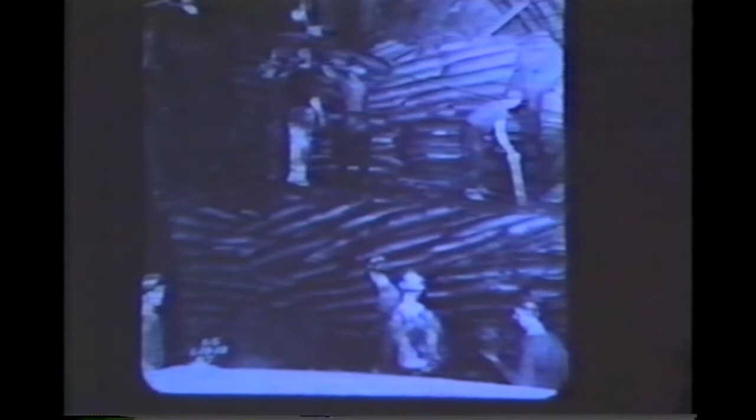This is the construction of a subway tunnel in Chicago 50 years ago. You can see that the excavation procedure was labor-intensive.

It simply consisted of slicing away the clay, throwing it by hand out to muck cars out in the end of the tunnel, and having it hauled away through the airlocks because the tunnels were built under compressed air.

The miner would simply slice off slabs of clay, throw it down to the muck car, hit it almost every time. And as the excavation advanced, steel ribs, liner plates, were put up against the crown, against the soil, held in place by these posts, which themselves were supported by bearing blocks on another block of soil.

You can see that was a pretty temporary support because the next group of miners were taking away this intermediate bench. In order to support that crown until the ribs could be extended on the intermediate bench, you see some little kicker blocks up there just to hold the lower end of the ribs.

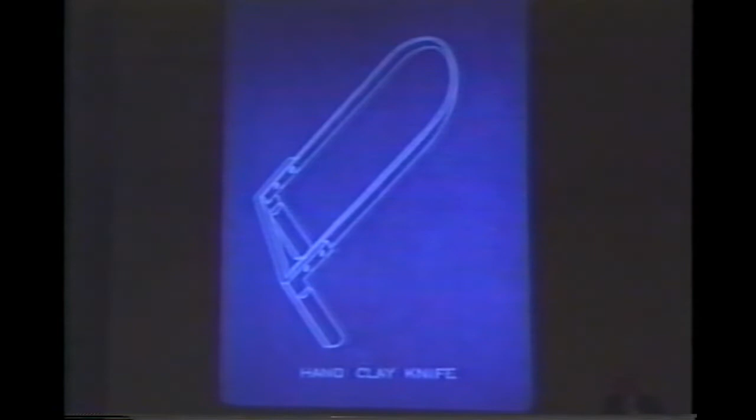This is a little sketch of the principal excavating tool, the clay knife that you saw the fellows using in the crown drift, for example. In soft clay, you could drag this through with two hands, get a chunk that might weigh 60 or 80 pounds, and your helper would catch it as you sliced it off and throw it down.

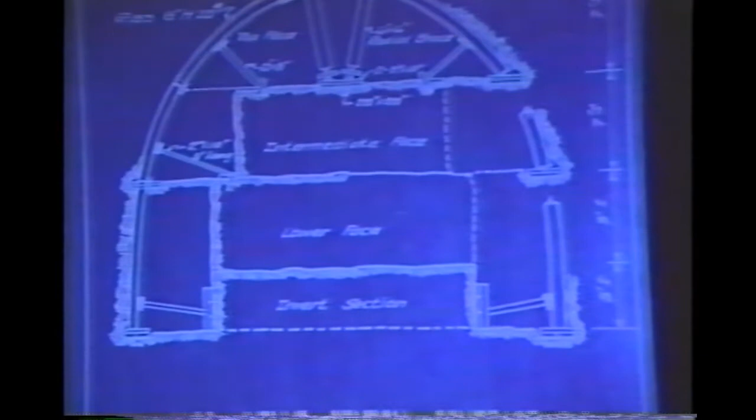This is a diagram of the procedure I've just described, and I simply want to show the more specific kinds of support that you saw at each of the different levels. And point out also that after this lower face was excavated, which you saw, the last thing to go out was the so-called invert section to make the excavation complete.

As you know, Dr. Terzaghi was the consultant to the city of Chicago on the subway tunnels. And we had set up a soil testing subsection, so-called, and indeed our first duties were soil testing. When he got the job as a consultant, construction was just getting underway.

And when we organized the soil testing laboratory, there were as yet no test borings that you would call at all modern test borings along the line of the subway routes. So for the first few months, we were very much occupied in making borings and laboratory tests to determine primarily the strength of the clay and to try to get ahead of construction with the boring program.

But after a little while, just a few weeks actually, we were beginning to catch up, and we discussed, Dr. Terzaghi particularly, discussed the reasons why settlements were occurring and what might possibly be done about it.

And he suggested it would be a good idea if we could measure some movements in the tunnel, see how much the ground was coming in. And with that suggestion, hardly saying more than that, he headed back to Cambridge and left us with a job to do.

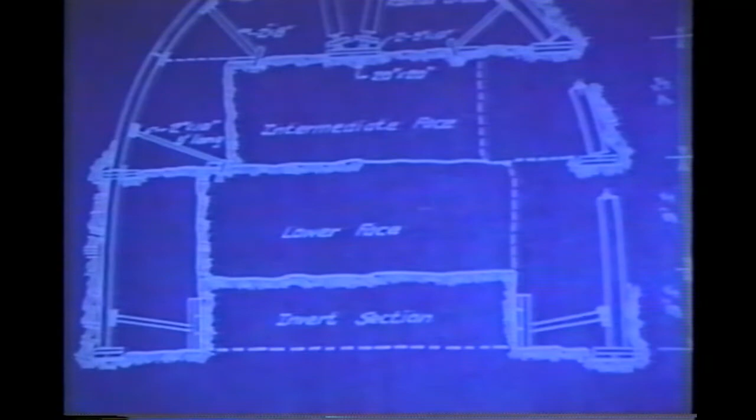But this group of us decided we would make measurements in the tunnel, see what we could get for Dr. Terzaghi over about a 72-hour period, continuously, to see what's going on. There were enough of us, so two at a time, we could be in the tunnel and observe everything that we could.

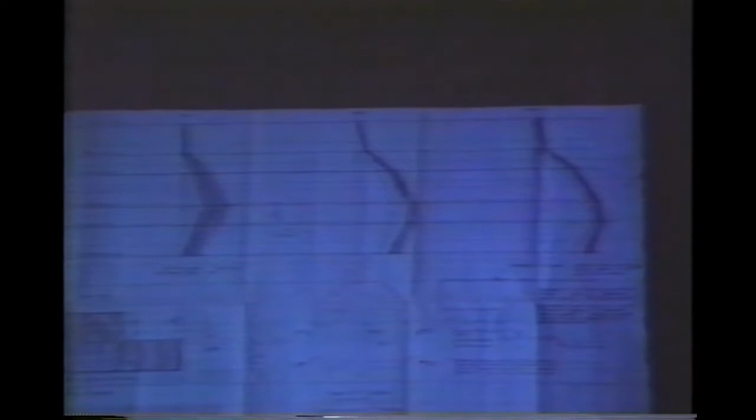Up at the top, across the top, you see a series of curves. They are settlements measured on the street over the tunnel at 20-foot intervals -- it's 20 feet from here to here, for example. Settlement reference points at the building line, at the curb line, and two streetcar tracks. Those settlements were read every 2 hours through the roughly 72-hour period that we carried out these observations.

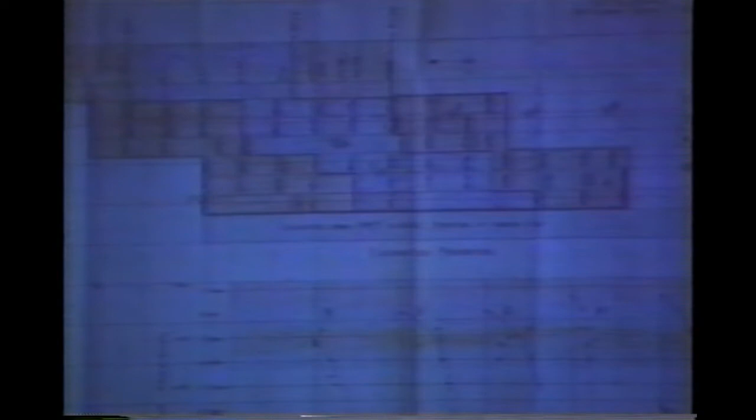Inside the tunnel, the heading was being excavated in a number of blocks: crown drift, intermediate, lower drift, invert. And the progress is shown by this intermediate diagram. When the observations started, the headings were located as indicated by these heavy lines -- the crown drift started from about here, the intermediate drift from about here, the lower drift from here, and so on.

Each of the different colors you see up there represents an 8-hour advance. So in the 8 hours, from the time we started until the next 8 hours, that sort of pinkish block of material came out at the locations indicated by the numbers keyed over here.

As soon as we had the possibility to put some reference points in the clay either side of the tunnel, we began to measure the distance between those points to see if they came closer together. Those distances are plotted down here, and we'll see them again a little closer up, color-coded with the times of excavation according to 8-hour blocks, so that the settlement observations, the inward movements from the sides, and the detailed excavation progress can all be related.

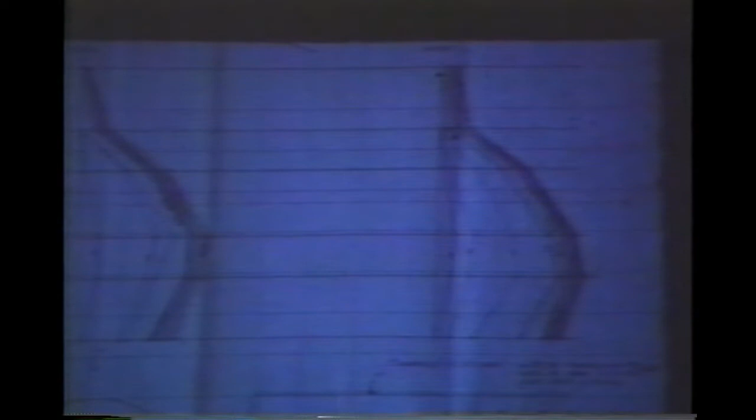We did a few other things. We drove ahead of the tunnel, as indicated on the left, some so-called spearheads, measuring out to the tail of them as we drove them, getting a distance back to a fixed point. Then as excavation came up to the spearhead's location, we began to look for it, feel for it, hoping the miners wouldn't hit it before we found it, and made another measurement back to the reference point to get some idea of how much the clay out in front of the tunnel was moving toward the tunnel as we excavated.

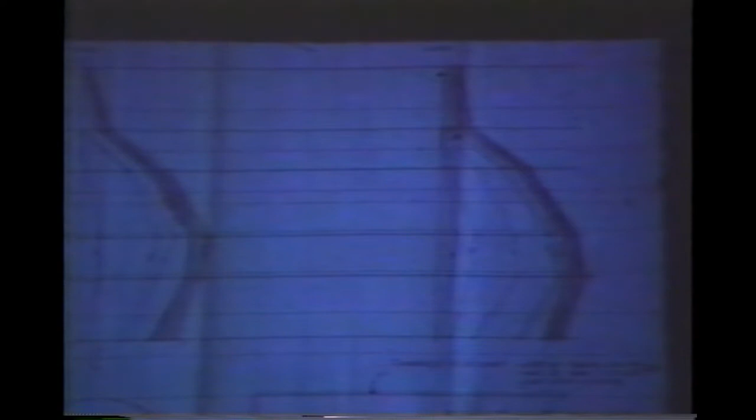We measured the settlement of the foot blocks after they were established. We established points in the crown and took level observations to see how much those points came down from the time the crown was first exposed until the 72-hour period was over.

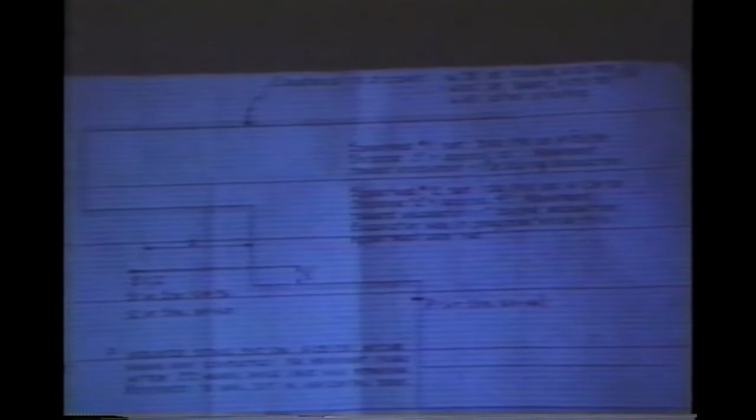Now we look at some individual pieces of this diagram. Up here is a longitudinal section showing diagrammatically where we put the spearheads. For example, you can see number S1 and 2 - those are spearheads driven ahead of the face. We couldn't get them in awfully far, but we could see how much that point moved in toward the tunnel as we took away that 6 or 8 feet of material.

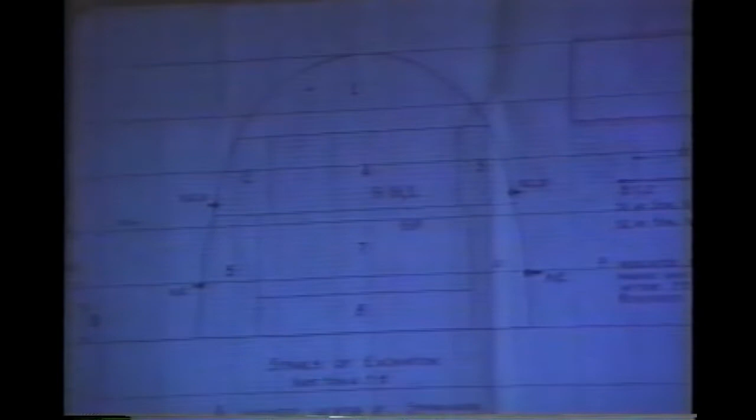You can see where that was located, plotted by S1 and 2 in this cross section. You can also see in the cross section the locations of the cross-tunnel lines.

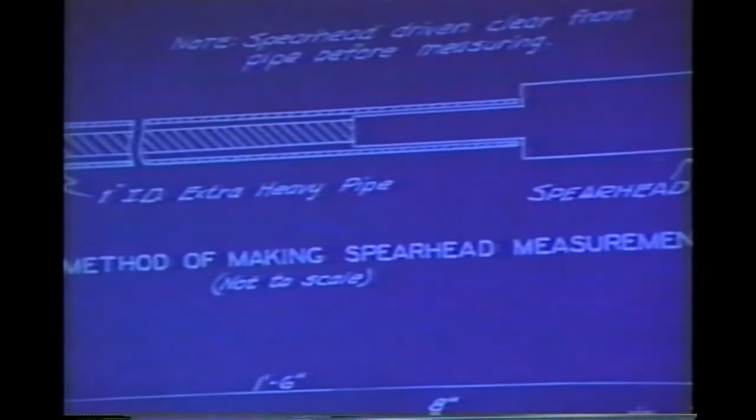You also notice there - this is the spearhead, just to show how it was done. It's a little thing, about 18 inches long, driven in by a pipe on these shoulders. While the pipe still had it in the ground, we could stick a rod in, find the location of the back end, get a good measurement to a fixed point. Take the rod out, take the pipe out, then travel along, hoping you can see that open hole until you encounter the spearhead again.

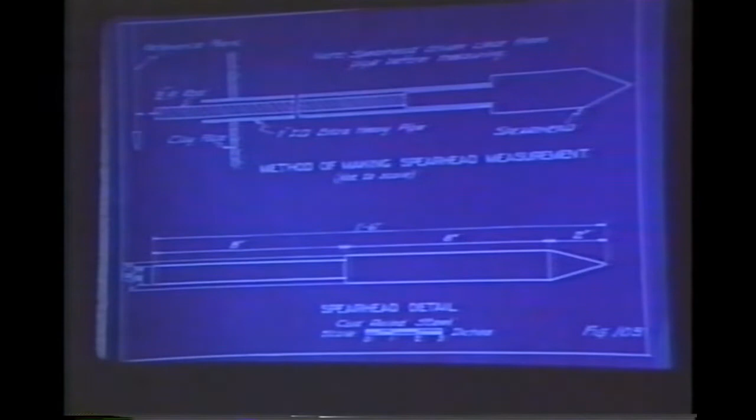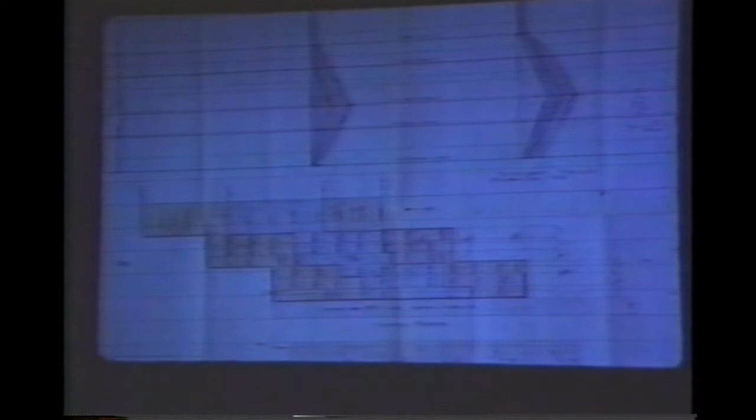Here is a portion of the diagram showing something about the settlements. You can see the progress chart a little better, and you can see a couple of the settlement diagrams over the tunnel.

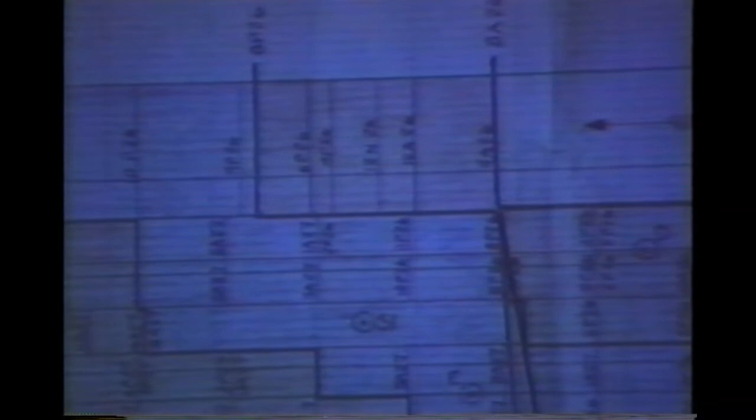Without going into the details of what we learned, I can point out that when excavation started in the crown heading, going in this direction from this point, you see very little pink, just a touch of it on the left-hand end of that upper diagram. That means hardly any settlement had occurred when the heading reached this point before we started observation, and very little settlement occurred while this material was taken out - that's the pink zone on the very left edge. Already that told us something we didn't know: that in this tunnel at least, removing the crown heading itself didn't cause much settlement out ahead of the tunnel. That had been just a source of argument up to that point. Now we knew it wasn't happening.

You can see that when the next section was taken out - the crown heading going from here to here and the intermediate from here to here - that fairly large bluish section represented the settlement that took place, which was substantial. You can see the settlement was still going on, the next pink section, when the whole tunnel went by. And quite a bit of settlement was still going on, the last colored section on the right, when this invert block was taken out. So we're beginning to relate what was going on at the street surface with the excavation sequence itself.

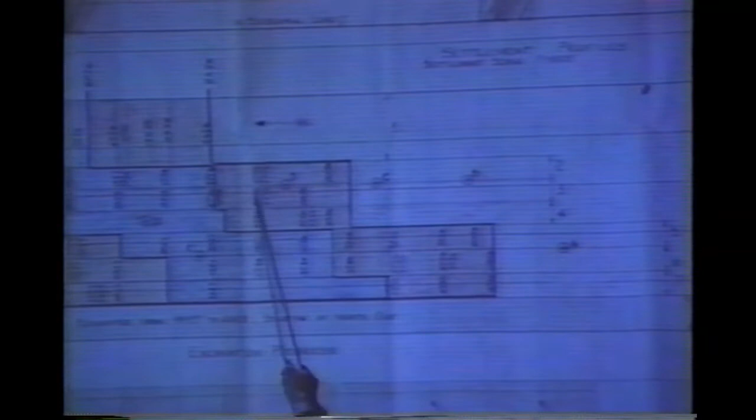I'd also point out these were the locations of the cross-tunnel lines. We started out with some before excavation began, so obviously there'd been some movement before we got them in. Then when we went by this location, we established another one, and when we went by this location, we established some more, and followed the inward movement of those points.

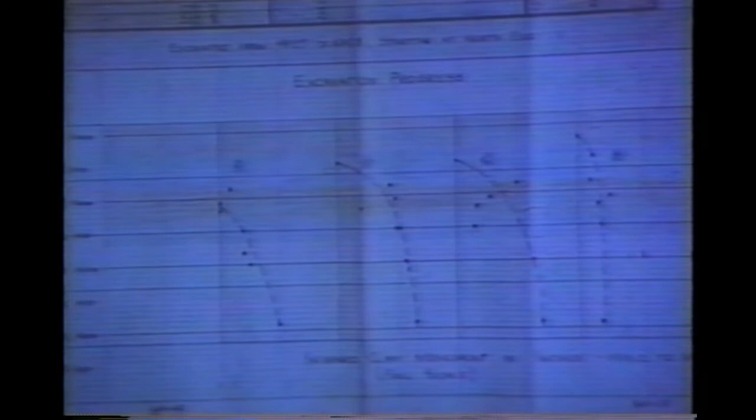Here we have the results of that exercise. You'll recognize that same diagram up there representing progress. With the same color keys, we have time reading downward, and inward movement. This represents 1 inch, so you can see there was more than 1 inch of inward movement at most of these reference points—that's the total diameter decrease, the sum of the inward movement of the 2 points.

When Dr. Terzaghi came on his next trip, we brought this diagram out and showed it to him. He concealed his pleasure with some difficulty—he really was quite excited about it, but he didn't want to overdo any praise. We thought we'd done a pretty good job, and we realized he thought so too.

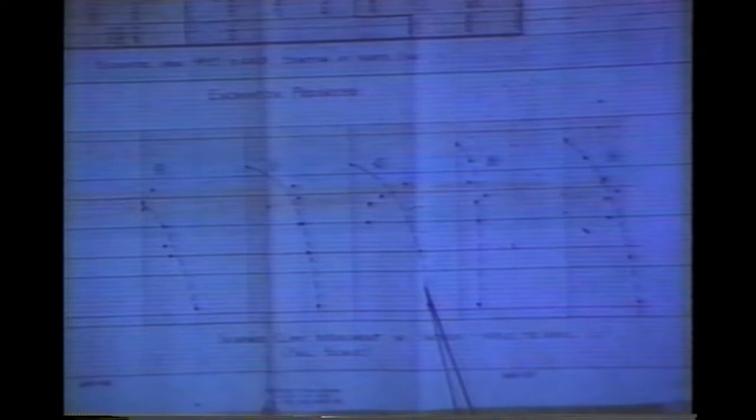But the thing I remember most about his looking at it—he said, 'You look at these points. Why did you draw a smooth curve through all those points that aren't anywhere near the line you drew?' I said, 'Well, our observations aren't any better than that. We do very well if we can be right within a quarter of an inch.' And he said, 'You can measure a line 20 feet long more accurately than a quarter of an inch, I'm sure.'

Yes, but remember, first of all, we're targets down there. The miners enjoy seeing how often they can hit our tape, throwing these clay chunks—all sorts of activity down there. They don't stop mining just because we're there; it's pretty hard to do. That's really the accuracy we have, so I just drew a general curve through them.

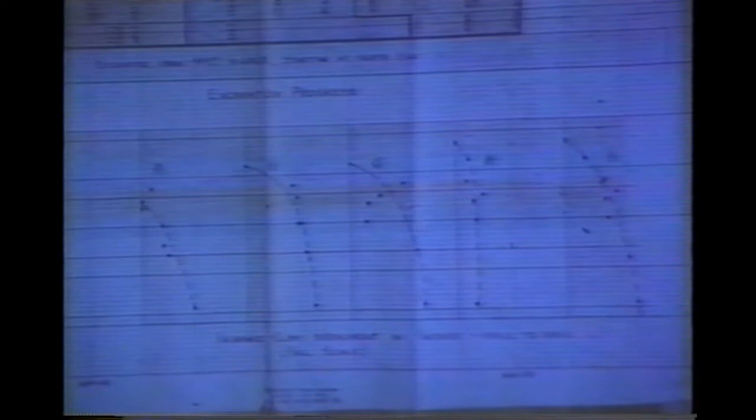Quite obviously, he didn't believe me at all. But he didn't press the point, since I seemed to be a little argumentative about it, and he said, 'Well, we shall see.' Keep that in mind, because it turned out to be an important thing in my life.

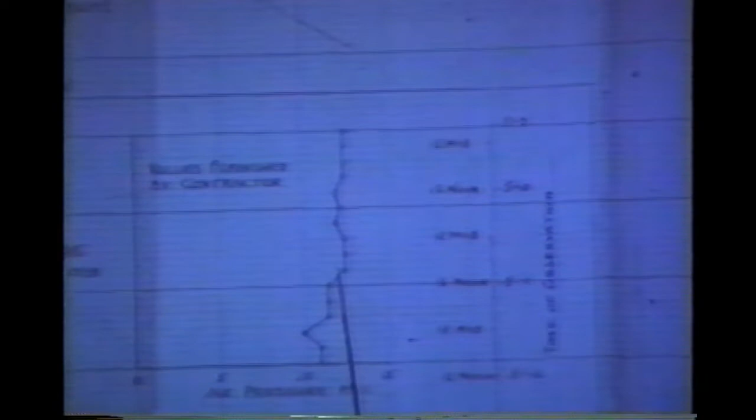Here's a little bit more of the observation. We kept track of the air pressure. You notice, again, time is reading downward, that at about the middle of the second day the contractor let the air pressure drop a bit. That did have some effect on what we observed.

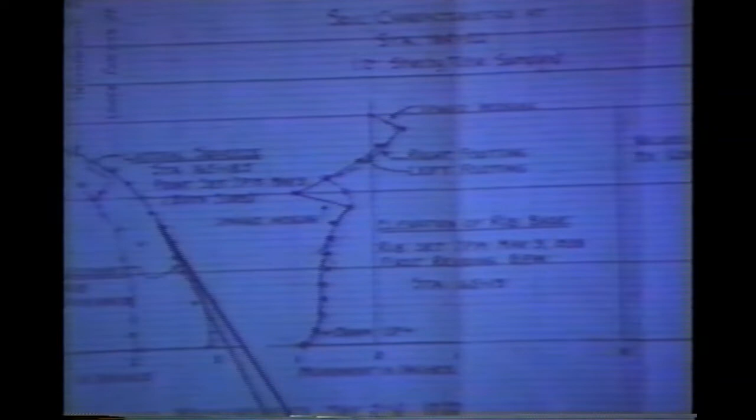A few days later, we came in to make some further measurements of crown settlement. These are curves of a settlement point up in the crown—you can see there's a little kind of a kick in it. Again, I drew curves generally through the general direction of the points, but not following the points exactly.

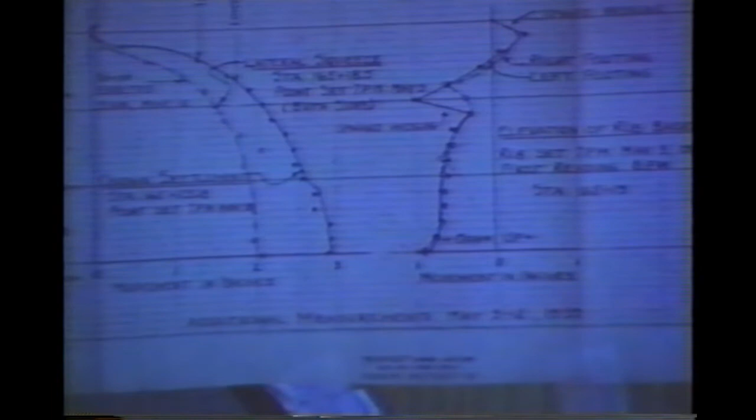Also, I'd like you to notice the date—these observations were made between May 9th and 12th, 1939. Today is the 11th of May, 1989. So I can almost guarantee you that exactly 50 years ago this hour, probably I, and certainly some of my buddies on the soil mechanics gang, were in the tunnel making these measurements. So this is sort of an anniversary.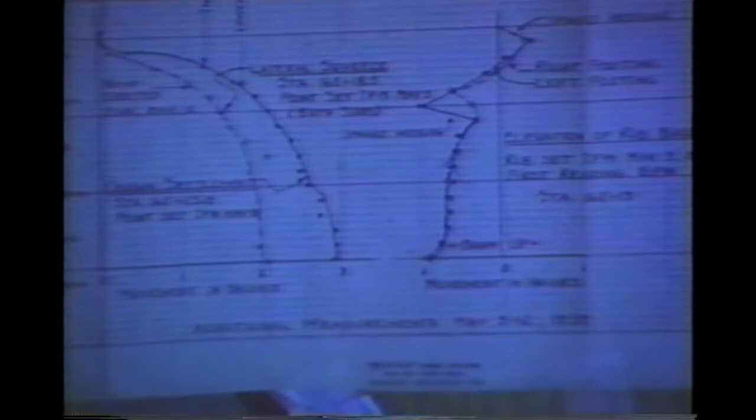We made some other squeeze tests in other tunnels with similar results, although the results varied because the contractors used somewhat different mining procedures and the tunnels were of somewhat different configuration. I'll show you a couple of those a little later. But that was in May, 1939.

In September, we got a long report from Dr. Terzaghi—a memorandum concerning results of squeeze observations on the Chicago subway project, in which he discussed the settlement observations being collected religiously over all the tunnels, and these squeeze tests. Here he has replotted those movement curves that I had drawn smooth curves through. You'll recall I had, with his changed scale, what looked like a parabola going down through here, and a similar curve coming through here, and so on, ignoring these little bumps.

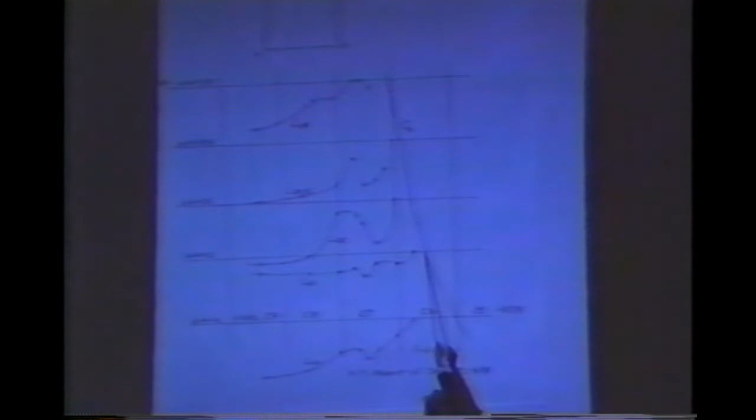Terzaghi, in his report, said, 'Well, now the progress through the 20-odd feet that you observed in this squeeze test was pretty regular.' At the beginning, on the 26th of April, the tunnel was at about station 164 plus 16. As it advanced through the day, it got up to station 164 plus 21—it got there by about half a day, and the rate slowed down a little bit, but this is a pretty smooth curve, so progress went along smoothly. You'll notice that the bump, this hump that comes after the trough in all these curves, kind of line up at the same time.

He said you would expect in a plastic material, like the clay we normally see in the tunnel, that things would happen gradually, with successive movement as each of these curves that look similar show bumps following at time intervals corresponding to the rate of advance. But he said that doesn't seem to be the case. They all happen about the same time. I've always suspected, he said, that these plastic clays really behave like brittle materials. We never get to see them in that state because by the time we see the clay, they've experienced enough deformation to become plastic. But this demonstrates how brittle the material was as the tunnel went by.

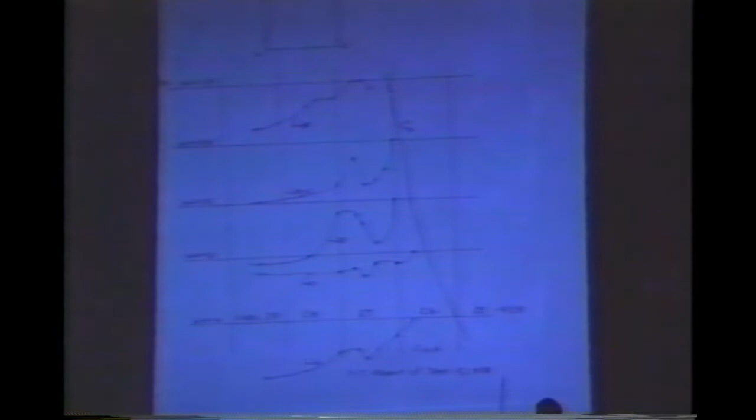Furthermore, he said, there was something he noticed. These curves all had the bumps. And in addition, particularly on some of the other squeeze tests I'll show you, the crown reference points didn't come down smoothly either. They would often settle a bit, then turn around and perhaps go up, then come down again. So he said, this is all part of a reasonable pattern.

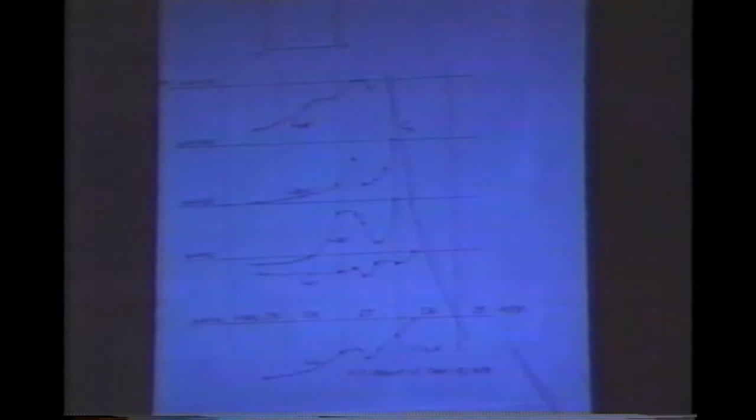Look at that top diagram. He said that rectangle represents the place where the future tunnel goes, and I'll draw a rectangle to make it easy to describe. The crown is represented by that upper rectangle. That drift goes ahead first, and when it goes ahead, the crown begins to come down - the roof sags, in other words. And you get that lowermost curve, labeled E1.

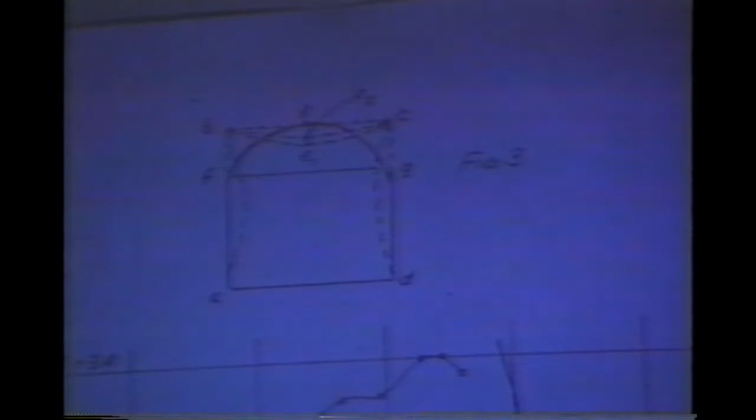The sides haven't come in much yet because the side hasn't been excavated that far. So those sidewalls stay about where they were. Then the whole tunnel advances, and the sidewalls, being high compared to the width of the tunnel, begin to move in - move in very energetically, in fact - and as they squeeze in, that has a tendency to push the crown up. So we should expect to see a reversal in the direction of the crown, or at least a slowing down of the movement. Then as we go on farther, the general movements resume - the crown comes down again, the sidewalls come in again.

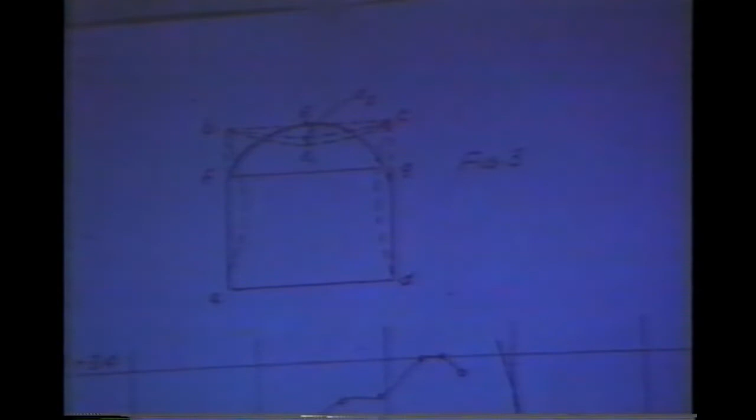So it's natural - it makes sense that these inward movements show a reversal of trend, and it's similarly natural that the crown tends to show a reversal of movement.

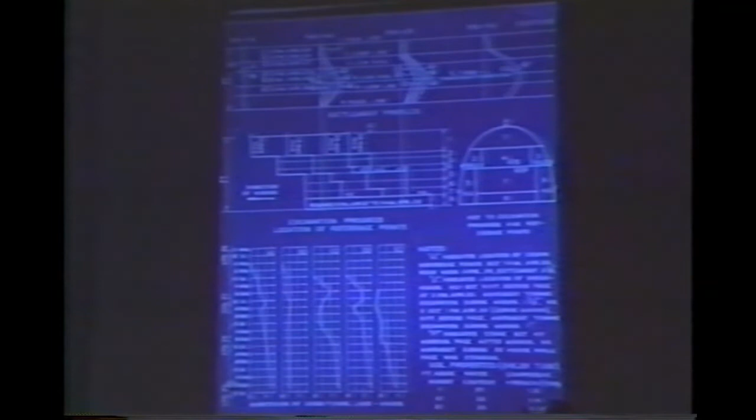When I was writing the final report of the subsection's work on the subway, I reproduced this squeeze test on contract S5 on one 8.5 by 11 sheet, eliminating much of what you saw. Here now are the diagrams representing the shortening of the cross-tunnel lines. This time I learned my lesson - I didn't try to draw smooth curves through these lines. These represent the actual readings.

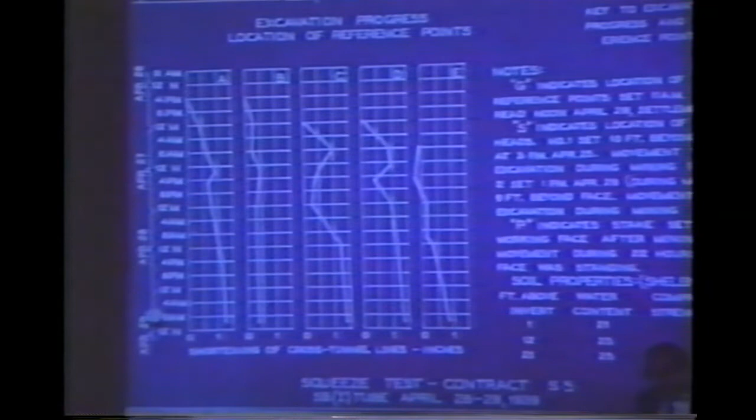If we look at some of the other tests, here's one on the twin tube that went alongside the first one where we ran the test. You can see the crown settlement, for example - the crown came down a ways, then kicked up a little bit, then started coming down again. The side movements were irregular, but rather similar to what we had before.

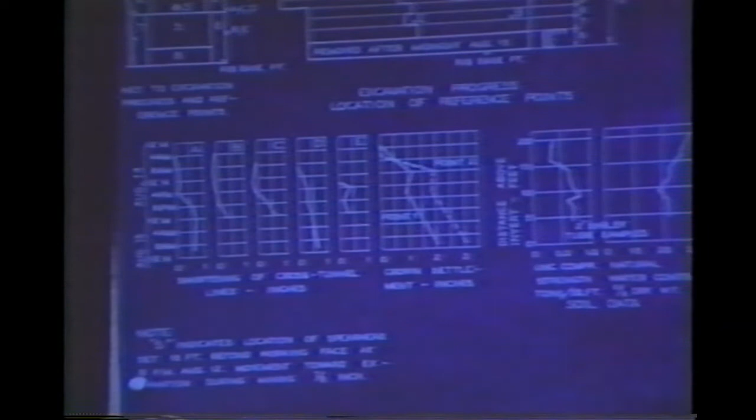On still another contract, in appreciably stiffer clay, you see what happened to the crown? The crown came down and went right back up where it came from. Presumably if we'd observed a little longer, they would have again started to show downward movement. But that reversal of movement in the crown was really there. Much less movement in the sidewalls, but again the same sort of reversals - much less total settlement, because it was a tighter mining job, a rather different procedure.

But it illustrated that Terzaghi was right about these movements meaning something. So we learned two things from these sets of observations - nothing to do with any theory, unless you want to call that little rectangle Terzaghi discussed as representing theory. We began to learn where the settlements were coming from - that is, what construction operations led to what settlements.

At first, the contractors were not at all happy to have us interfering with their work. At first they regarded us as spies, giving the resident engineer some sort of handle to make life uncomfortable for the contractors. But as the contractors began to appreciate that there was indeed a relationship between damage they might be causing and how they excavated, they got interested in preventing the damage.

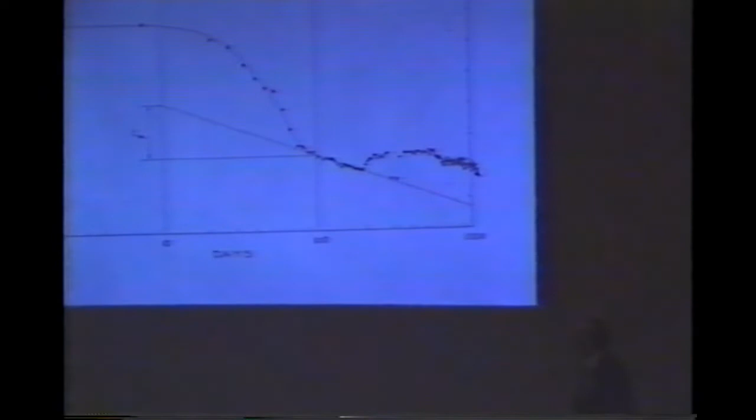Well, part of the story, of course, was these settlement observations. But another part of the story was the installation of piezometers at various depths so that you could observe the excess pore pressures associated with the fill and see how it dissipated. One of the interesting things would be whether the time required for dissipation of the excess pore pressures corresponded to the time to reach somewhere near 100% consolidation.

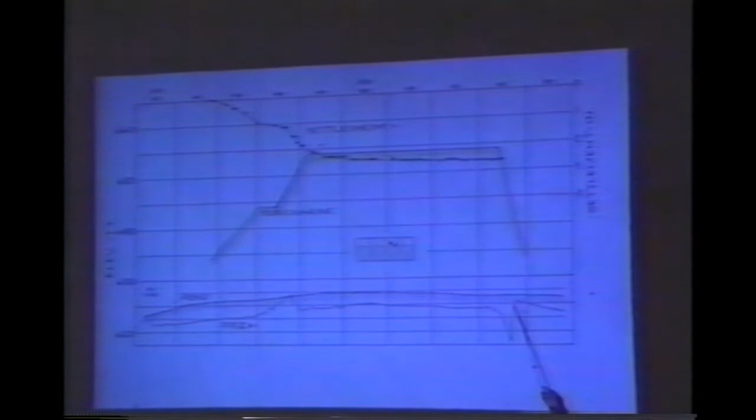Now, at another point, this latter phenomenon was even better accentuated. You'll notice this dip in the piezometric curves. We had probably 50 piezometric observations of this type around the plant, and many of them showed that as the surcharge was taken off, the pore pressures went down, then bounced back again, and dissipated. That's what they should do on relief of load. When you take off X feet of head, if you had 100% pore pressure response, you should get, briefly, X feet of decrease in pore pressure level.

We discovered that they could only take these readings at intervals. This wasn't an automatic, every 10-second readout, automated procedure as we might have today. And every time we didn't get one of these dips in some piezometric observation, it was because observations weren't made at exactly the time when that fill was taken off. Whenever an observation was made at the time when the fill was taken off, close enough to that time, we got this little dip, which gave considerable confidence, I think, to the idea that the piezometers were doing what they should.

They were simply telling us that the pore pressures never got very large, which means that the foundation was fairly permeable, which means that we had achieved our consolidation even more rapidly than we had hoped. If we look at this piezometric curve, we can recognize the same thing, not quite as big a hump on the first loading, pretty good-sized hump under the second loading. There are dozens of these curves. They all show these characteristics.

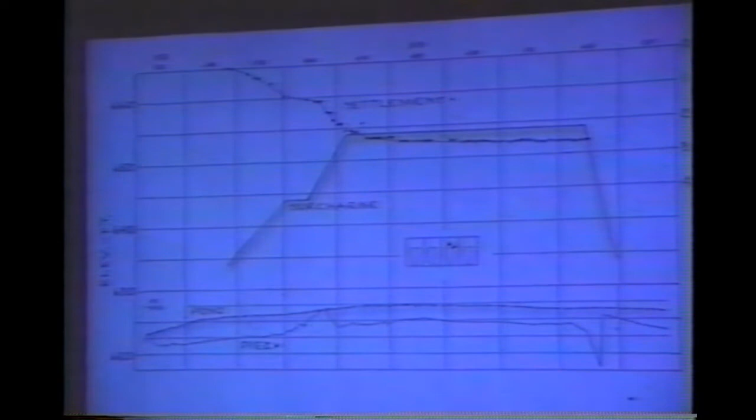And so here is, I think, a misuse of the procedure of letting the ground tell us what's going on. This ground was telling us, as best it could, what was going to happen under this building in the future. The ground was really speaking to us, but the right people weren't listening. And that is a misuse of the observational procedure.

This last example is Gardiner Dam up in Saskatchewan on the South Saskatchewan River. It's a project that was in the planning and design stages, beginning back in the 1940s. Bob Peterson, who was a soils engineer for the Prairie Farm Rehabilitation Administration, the PFRA of Canada, had been a student of Arthur Casagrande's. He went to the job, set up a good Harvard-type lab with the latest equipment as per the 1940s, and began to make stability calculations for the dam and to design the dam.

It's obvious that this is in landslide country. This is downstream of the existing dam, with slump topography all along. It's up in the Bear Paw Shale region. The dam indeed rests on the Snakebite member of the Bear Paw Shale, which is the most bentonitic of all the members of the Bear Paw Shale. Everybody recognized this was a very tricky foundation, to say the least.

Bob Peterson arranged for Arthur Casagrande to be a consultant on the job. Arthur realized it was a difficult job, so he involved Terzaghi, and they both worked on it for some time. After working on it for a few years, Stan Wilson came to Harvard, and I'm sure somewhere in that time he became acquainted with the job. He probably had something to do with the instrumentation and with the tests on the materials.

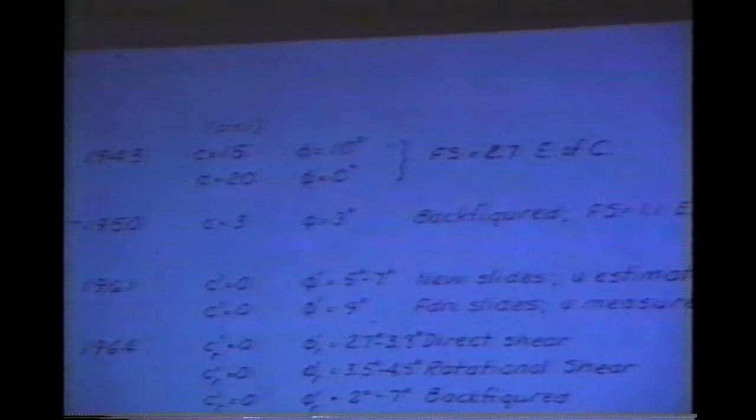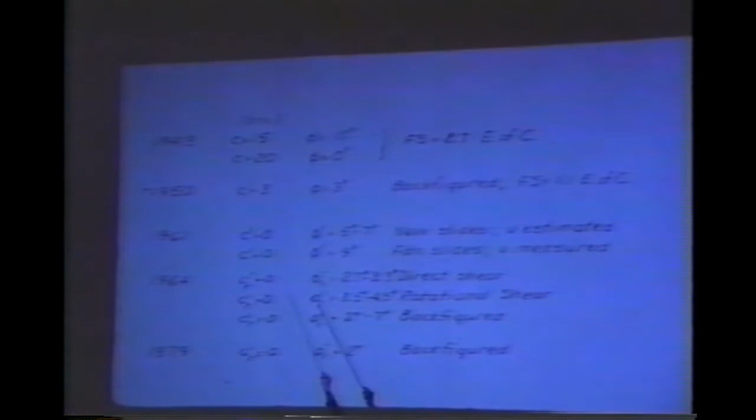Here's a chronology that goes far beyond those times, of various analytical stages in the design and lifetime of that dam. Starting in '43, when Bob Peterson made his first tests, according to lab tests he could use two different sets of undrained parameters: cohesion of 15 psi and a friction of 10 degrees apparent friction, or just plain 20 psi cohesion and no friction. Then came the back analysis of the slopes, and my goodness, that turned out to be a cohesion of 3 psi and only 3 degrees.

Came 1961—the Boulder Shear Conference in 1960—effective stresses now made their way to the United States. We find effective cohesion of 0 and effective friction angles back-figured to be somewhere between 5, 7, or 9 degrees, depending on the history of the slide. Then came 1964, Skempton's Rankine Lecture, and we learned about residual strength. People realized these are old slip surfaces, therefore we should be using residual strengths. So some tests were done on residual strengths with different kinds of equipment.

Zero residual cohesion, of course—low values, the highest you could get about 4.5 degrees, the lowest about 2. And to come up to practically the present time, 1979, after the dam has been in existence, we have a history of behavior, and we know the factor of safety, as you'll see shortly, has got to be pretty close to 1. People tried more analysis to see if they could get a factor of safety of 1. It turns out that, back-figured from the existing behavior of the dam and assuming the factor of safety is 1, you have no effective cohesion, and the residual friction angle is something in the order of 2 degrees. That's quite a history of design, spanning virtually the whole history of shear strength in soil mechanics.

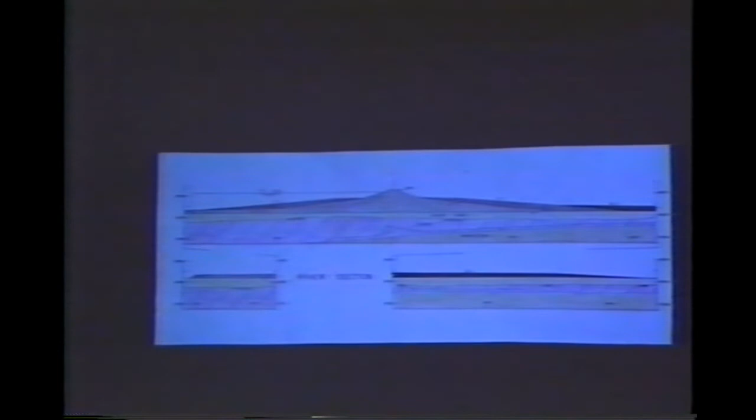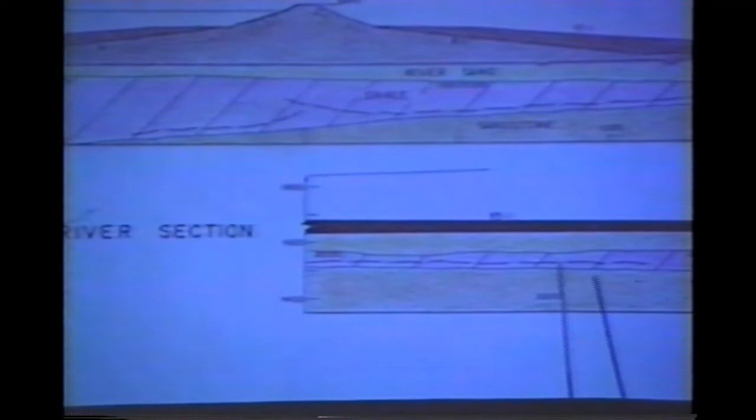Well, this is the section of the main part of the dam—couldn't get it all in one diagram. It starts out at fairly modest slopes, 4 to 1, flatter 8 to 1, and so forth. The original dam stopped up here above the pointer. After a redesign, they flattened the slopes so the toe came out about here. And in the final design, the slopes keep on going out there. This slope, the average slope, is 8.5 to 1.

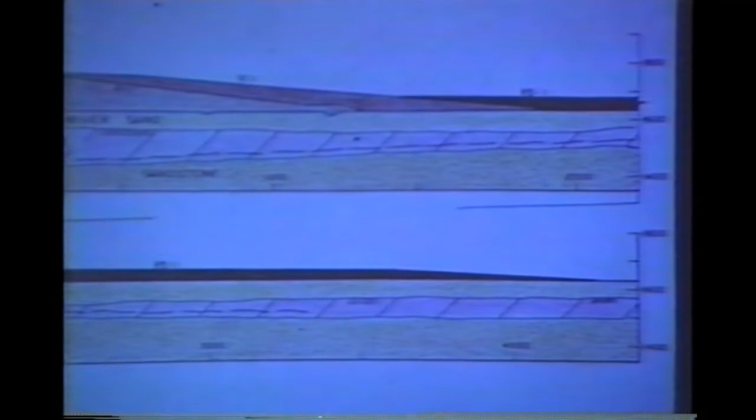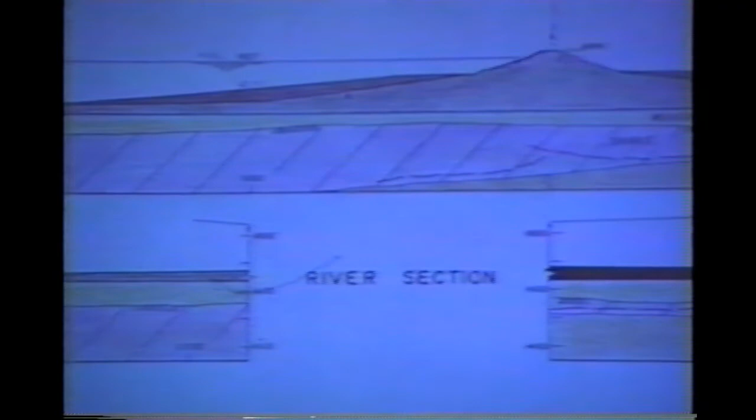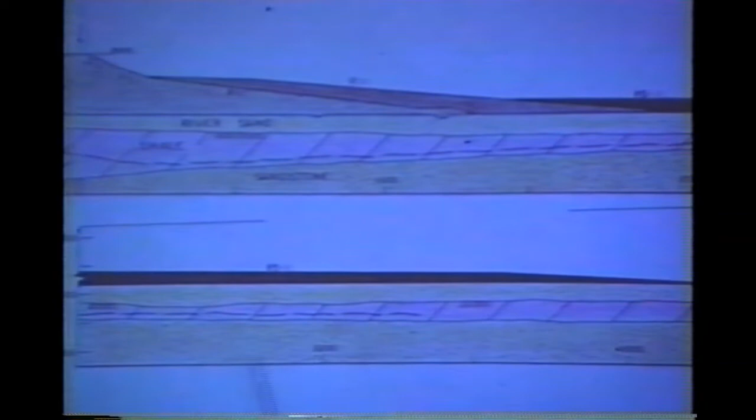Now that could be a little misleading, because they carried it out to this point since there had been some wrinkles in the ground there, and they wanted to be sure they put surcharge over the zone where they knew the failure reached. They also knew the failure was occurring along a slip surface in the shale, somewhere above a sand layer incidentally, which was drained very effectively by wells.

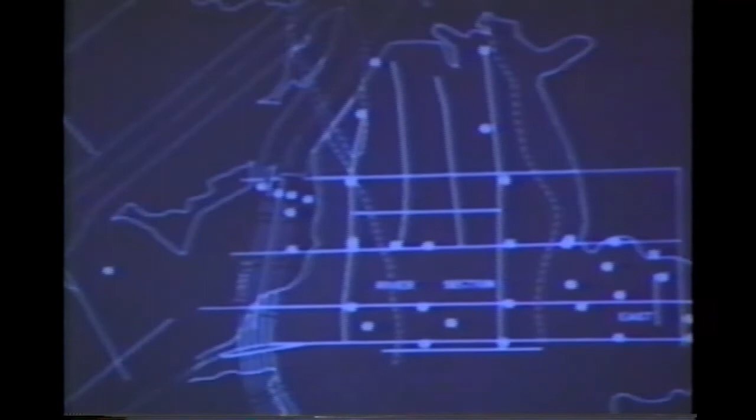Now there's hardly any dam that I know of that is more instrumented, better observed than Gardiner Dam. Here are slope indicators all over the place. These are the ones that existed at the time of this drawing. A great many of the slope indicators sheared off and had to be replaced. These are just the ones that were working at any one time.

There are piezometers along the surface of sliding, above the surface of sliding, and so on. So that today we know without much doubt what the pore pressures are, even on the surface of sliding, and we know what the movements are, where those surfaces of sliding are.

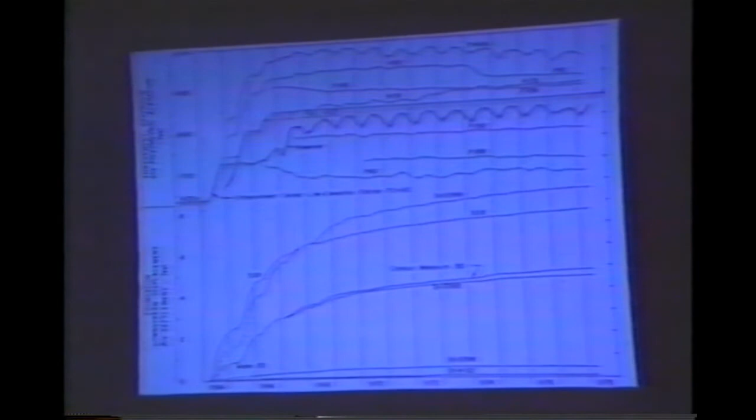But the real question, as of say 1978, was: are these movements going to approach a constant rate of movement? Will it still keep creeping along, in which case there was a possibility that sometime it might decide, having passed over sort of a peak, to increase? That would be dangerous. Or is it going to taper off and slow down?

Looking in a little more detail at what happens with the reservoir movements in the last years of filling, you can see the reservoir up above, fluctuating up and down. You can see, for example, in 1977, that the reservoir didn't get as full - that was a drought year. The other 3 years, it reached its peak.

You can see in the next pair of curves for different parts of the dam that each year, when the reservoir was filled, there was a jump in movement. And now we're talking about smaller movements - these are still meters, so we're talking about a few centimeters now. But each year they flattened off but didn't quite get horizontal.

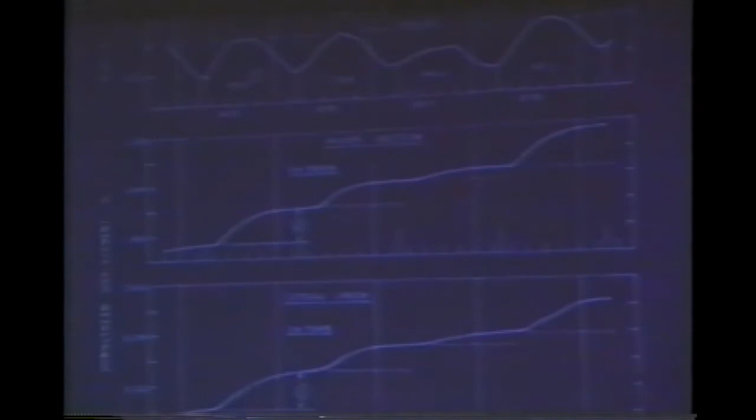The next year, another bump. This year, with the fairly small loading, we still had curves that were showing continued movement even under the relatively low loading. So the question has persisted on that dam for a long time: is it indeed going sometime or other to decide to accelerate and take off?

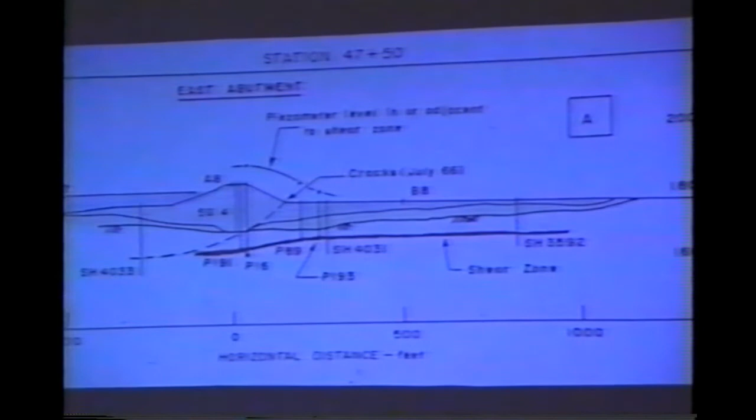I want to point out that it is possible to make some pretty elaborate and realistic stability calculations. The red line is the known location of the shear zone. There are slope indicators going through it, and they have displaced - there's no question where that shear zone is. Piezometers, you can see a few of those black dots - they're above, below, and in the shear zone.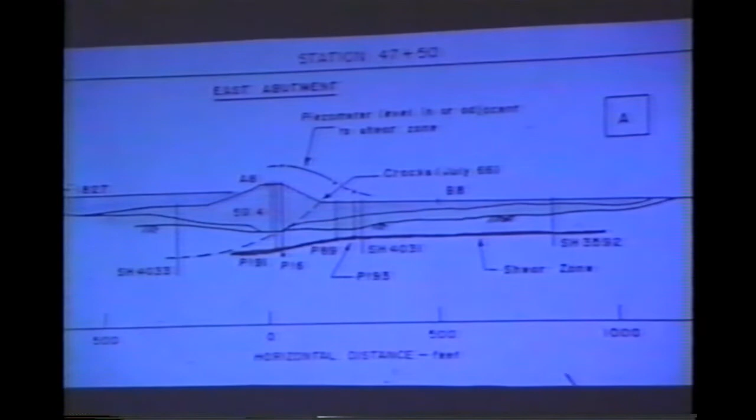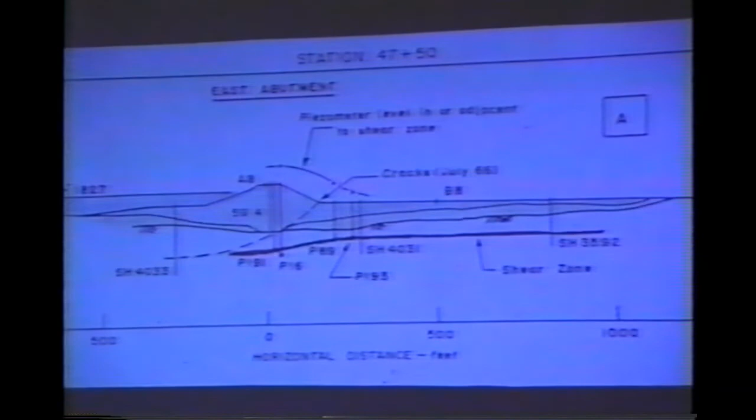You can see the piezometric levels near the shear zone, especially in the most active part - they're higher than the surface of the dam, and they haven't dissipated very much, just very slightly in the lifetime of the dam. Since we know where the shear zone goes, a stability analysis can be made in which the boundary conditions are pretty well fixed. And here is the latest of the stability analyses that the PFRA carried out a few years ago.

Breakout just down below the end of that 85-to-1 slope. Shear surface, which is the bulk of the resistance, very well known. We don't know exactly where the upper surface is, that is where the active zone ends. So they took 3 different positions and made a calculation accordingly.

Piezometric pressures along those back slopes do not vary appreciably with reservoir level. Piezometric pressures along the shear zone also don't vary much with the reservoir level. So the result looks something like this: if you assume a shear strength of, say, 9 degrees residual strength, and the 3 different possible positions for the active zone, you get 3 points with the minimum, and you see a factor of safety of about 1.7.

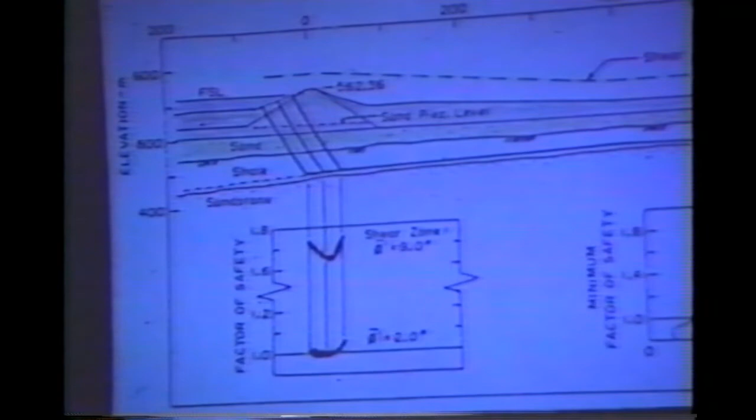Well, the movement behavior you observe certainly isn't compatible with a factor of safety of 1.7 - you'd say it's closer to 1. If you repeat with other values of friction, you get different values. When you get down to 2 degrees, you discover that, yes, you can get a factor of safety of 1, and that's where that 2-degree figure came from that I mentioned to you. And here is a relation that they developed between friction angle and factor of safety.

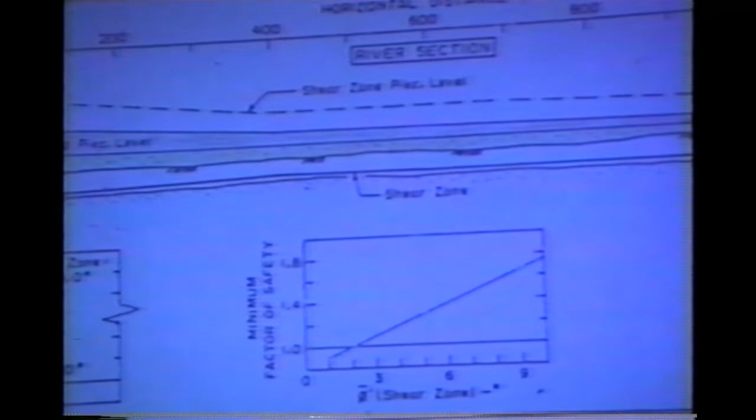So you might say that after 20 years of development in shear strength, after 20 years of collecting information, after 20 years of trying to make stability analyses, they finally achieved success. We can now get a factor of safety of 1 for something we know is on the verge of moving, if not actually moving. And that looks realistic.

But still, it isn't really realistic, because you'll notice that all 3 of those surfaces of sliding emerge into the pond at different reservoir levels. When you make the calculations, you discover that the reservoir level shouldn't affect the factor of safety really at all. The measured pore pressures along those back surfaces are pretty much the same for various reservoir levels. They're all below the lowest reservoir level. But we know that every time the reservoir goes up, the movements get a kick. So even this calculation doesn't tell the whole story.

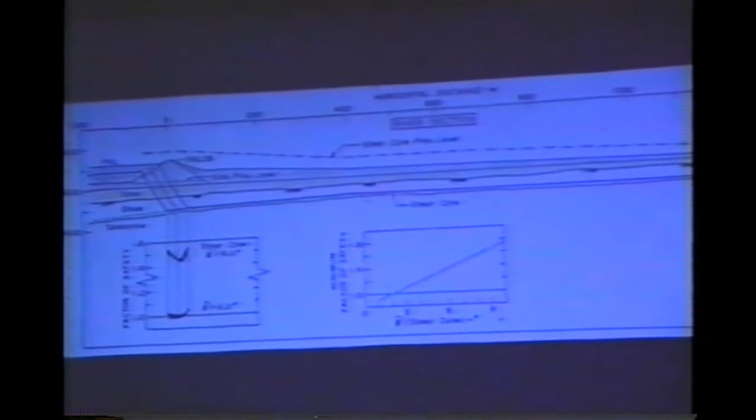How is one to judge the stability of Gardiner Dam? Certainly not by stability calculation. So we've taken 20 years for the calculations to roughly catch up with reality.

PFRA, quite rightly, under the guidance of its various consultants, and somewhere back here 10 or 15 years or so, Stan Wilson became a member of the board of consultants that reviews these things. PFRA people began to plot the downstream movement per year against the years. And they drew this band and saw that indeed the movements are decreasing, that the displacements seem to be flattening out. But again, that nagging question, they're not horizontal yet. And these are hard to define.

They also decided that there was a relationship between what they called the reservoir thrust and the amount of movement. They took as a base level the lowest position of the reservoir where it intersects the slope, and calculated the total lateral load on the dam due to the water above that level. Because certainly the rate of movement ought to have something to do with that lateral load.

And these numbers represent that reservoir thrust above elevation 541. You can see that when the reservoir thrust is low, the rate of movement is lower. When the reservoir thrust is high, the rate is higher. But there's a lot of scatter even in as late as 1978 or 79. So that's not very comforting. It doesn't still quite answer the question.

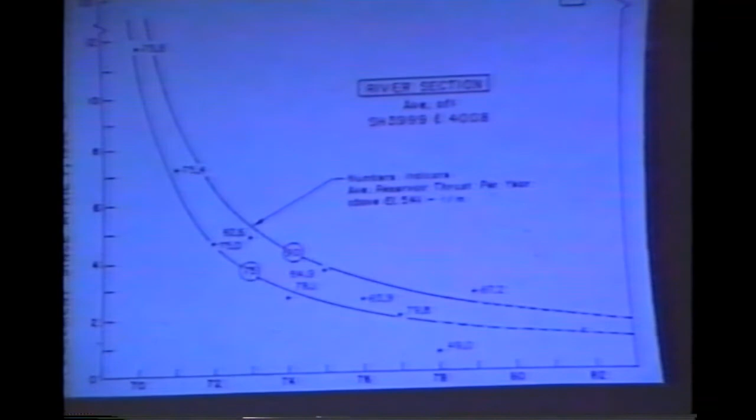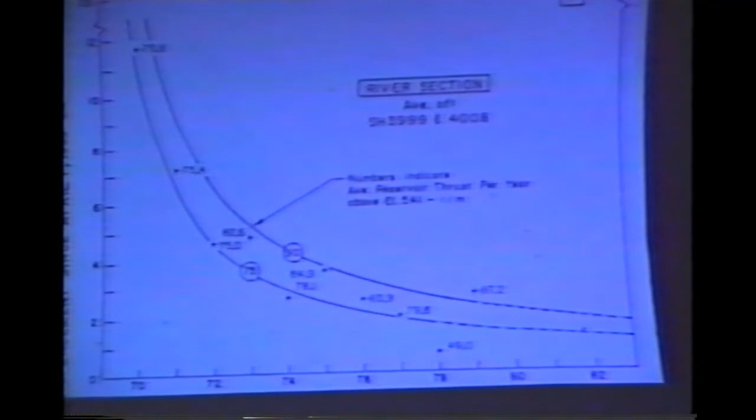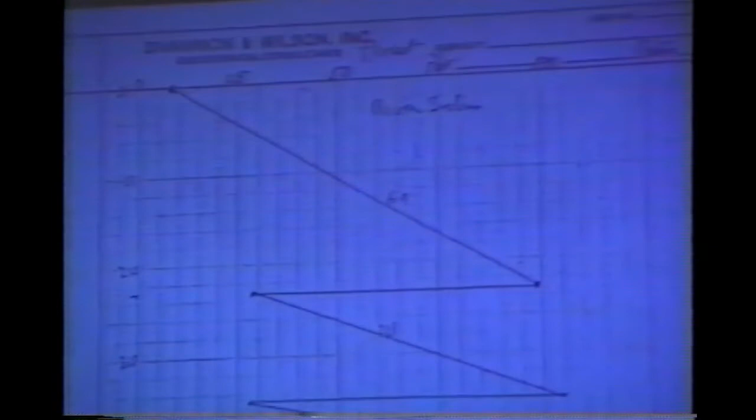All of the preceding studies had talked only about the maximum reservoir thrust each year. It occurred to Stan that the minimum value had something to do with it too. He said, if I plotted these values like you would plot a consolidation test, for example, you have starting up there at the top a certain settlement in 1969, a certain downward movement in this case. And then came an unloading period, and unloaded, not all the way back, but unloaded back to that point on the left.

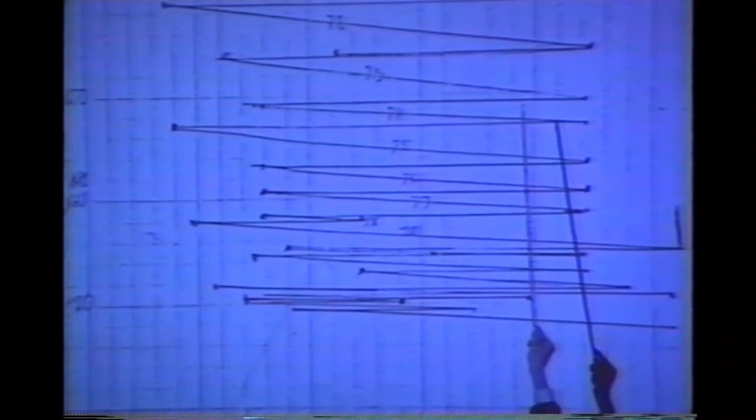And the next year, another load came on, and the reservoir thrust went up to this value, and the corresponding movement could be plotted. He said, I didn't worry about rebounding occurring because it didn't look like these points were backing up, so I just ignored that, and every time I simply drew a horizontal line from the settlement that occurred in one year and started with the load at the subsequent year. He said, this is what you get.

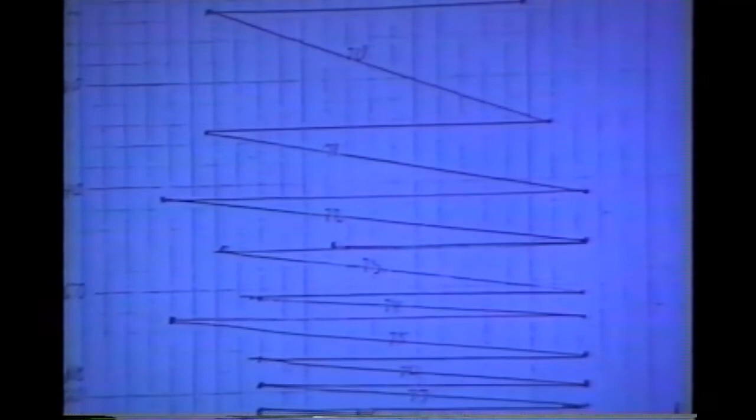Now, you must ignore these last two points because Stan's worksheet actually stopped here. I added a couple of these later. He said, look at those. Every one of those curves is a little flatter than the one before. That means the ground is improving. If those were parallel to each other or if they were getting steeper, that would be a sign of weakening. But that's not happening. They're getting successively flatter. And that means the dam is getting safer and stronger, albeit rather gradually.

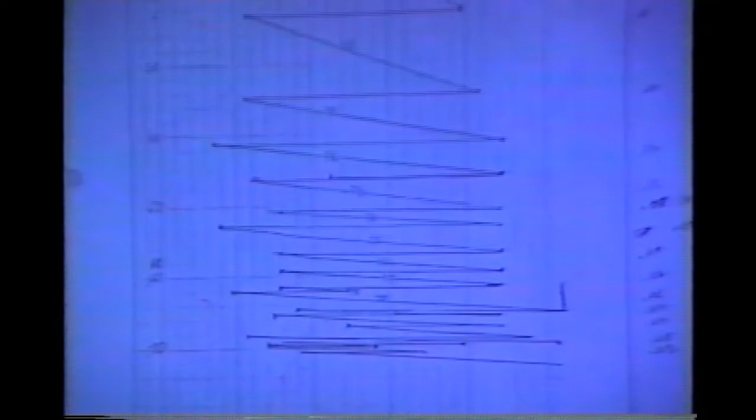Stan could hardly wait to get to the office that day and give a little lecture to the powers that be about how he got this and some other calculations that he made with it. I had always, in the last few years, come to think of this as Stan at its best, because I don't know anybody who got more pleasure out of working with good data, and these were good data, than he did. And he worked with it with imagination and could see things that hadn't turned up because other people hadn't played with things to that extent or with that much intuition.

So that was an exciting morning. It was a time I remember very much. It was the last time I saw Stan. Stan, you must realize, was younger than I by all of six weeks. I used to kid him about his being the junior. But we were pretty much twins chronologically, at least.

And we talked about a lot of things at that Gardiner Dam meeting at breakfast and dinner, other than the behavior of Gardiner Dam. We talked about the future, and I remember Stan saying two things. One was, I don't want to spend the rest of my life around old people. He says, I'd rather be with young people. And he said, I don't want to get old and decrepit. I want to go out with my boots on.

Well, the following week, after this meeting, Stan was looking forward to going to Detroit, where he got his honorary membership in ASCE, something that he prized very highly, and where he got the Rickey Medal. And then the next trip he took was to Africa, where he met the fateful mosquito. And I can't help but thinking that Stan got his wishes. He went out a little sooner than we would wish him to have gone, certainly. But he certainly went out with his boots on, and I suppose in the long run, nobody can wish for more than that. Thank you.